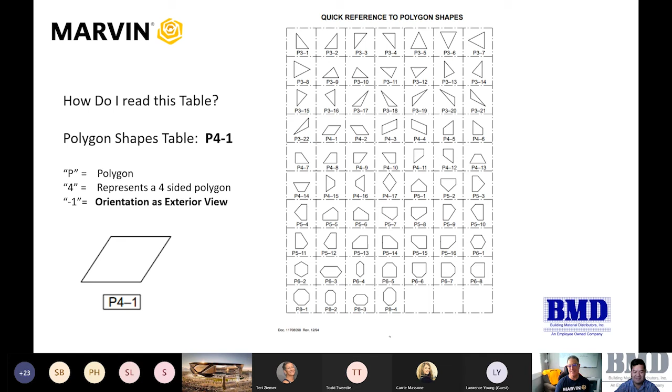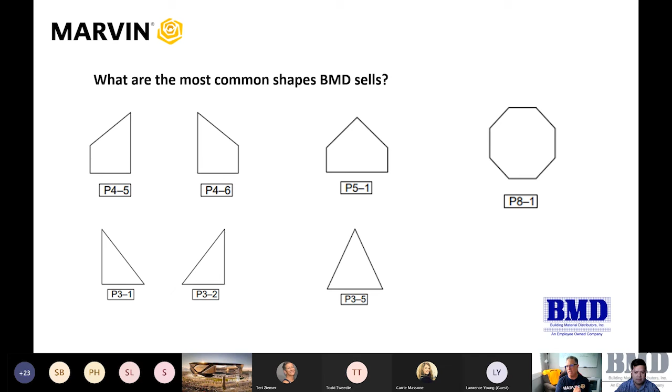Go ahead, next. By far and away, P4-5 and P4-6 are the most specified and sold polygons, but these five other shapes also come into play pretty often as well. So kind of commit these to memory if you like.

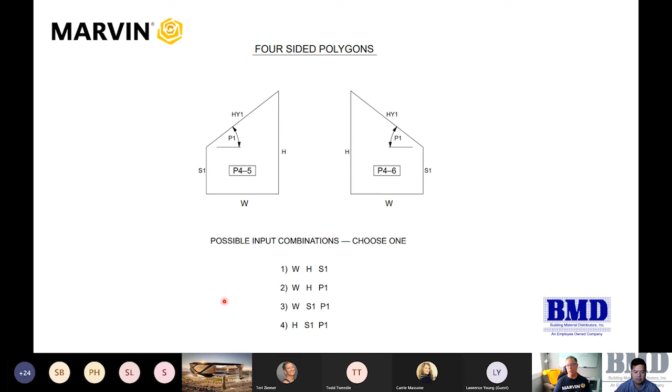There are several entry combinations depending on the information provided. So let's define: you have your width, your height (H), your short leg is S1, and your pitch is P1. You will need to receive at least 3 out of 4 dimensions here in order to correctly build the polygon you're wanting. There's several inputs in determining sizing for polygons. Width, height, and short leg is most common, but if an architect or builder gives us a pitch, we can use that in lieu of the short leg dimension.

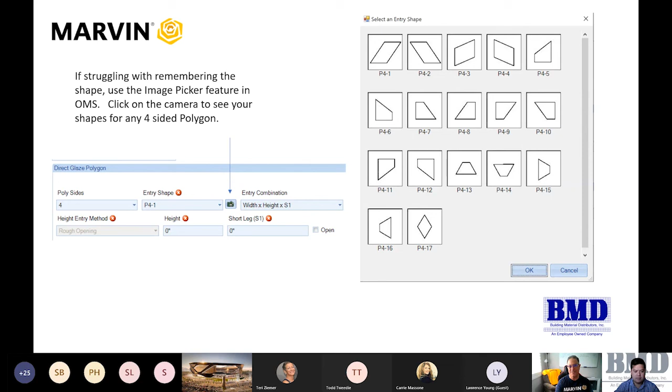Let me diverge here quickly. The image picker in OMS is your friend. This little camera icon has helped me countless times and saved me countless times. Whenever you see that camera in OMS, get into the habit of clicking on it. Marvin sometimes calls things something you may know as something else, so every time you see that image picker, please click on it. It will save you headaches down the road for sure.

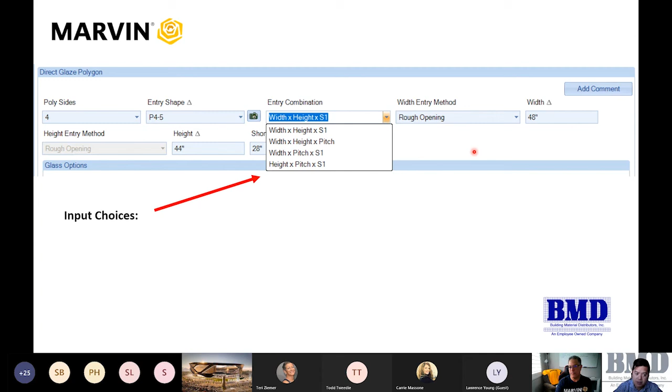Input choices: in OMS, when building the polygon, use one of 4 combinations for sizing. These combinations are utilized when building ultimate, elevate, or essential polygons. I've noticed on a lot of the plans in the design phase, sometimes they only have 2 pieces of information, so I have to reach out and ask, do you have the pitch of the roof, or the measurement of the short leg? A lot of times in the design phase they don't have the short leg, but they will have the pitch of the roof. So if we select this, the option for pitch will show up, and then you can enter your pitch, which Randy will talk about here.

If you receive pitch as one of your dimensions, please don't get nervous, it's still fairly simple to enter. It's typically written as 5/12 or 4/12, meaning 5 inches of rise for every 12 inches of run, or 4 inches of rise for every 12 inches of run. That's what they mean, and that gives you your angle. They read it as 5 and 12, 4 and 12. You can even do a custom pitch - if you scroll down, it'll allow you to put a custom pitch that's not supplied there.

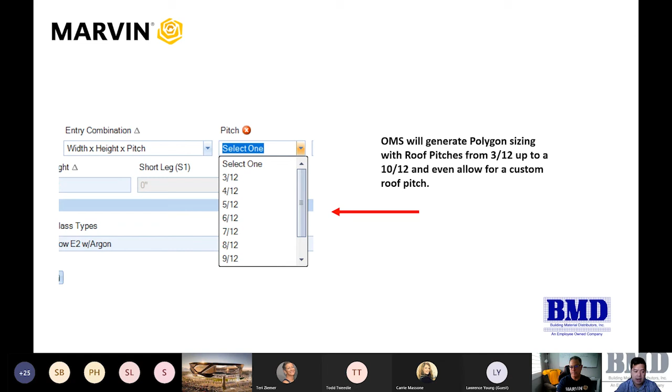I can't see the chat box, Randy, so you'll have to monitor that. If you see something missing, feel free to type it in.

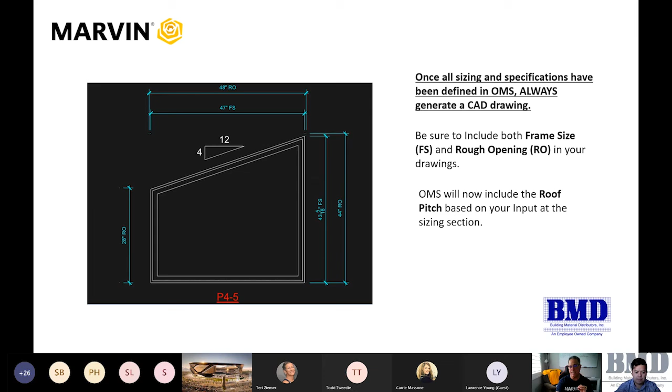Once you hit done creating it, go over to more actions, scroll down to view CAD drawing, click that, and these images will pop up for you. Very simple. To get the mirror image, copy that line and go from P4-5 to P4-6, then hit done. Same process again: go to more actions, view CAD drawing.

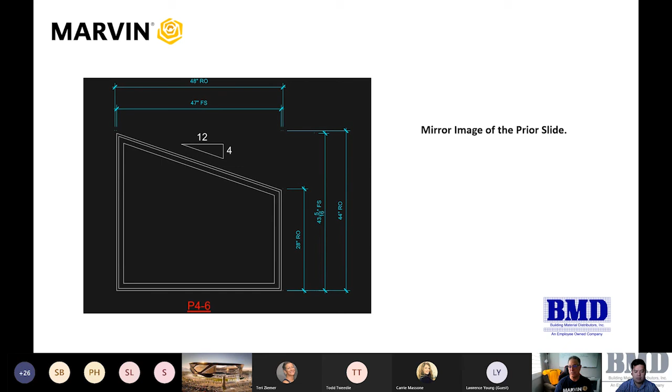Okay, very important to do — and save. Yes, and save. Please save, hit save.

This slide right here is something Alex threw together in a matter of minutes, and it's a great way for you, the dealer salesperson, to save your backside down the road. Any kind of sizing issues, you're going to want this sign-off sheet. It's literally utilizing a blank Word doc and the snipping tool. Put this together, send it out, make sure you're getting these signed, having a paper trail like this attached to any quote or purchase order — it can exonerate you from any potential liability of sizing or shape errors on the Marvin Polygon.

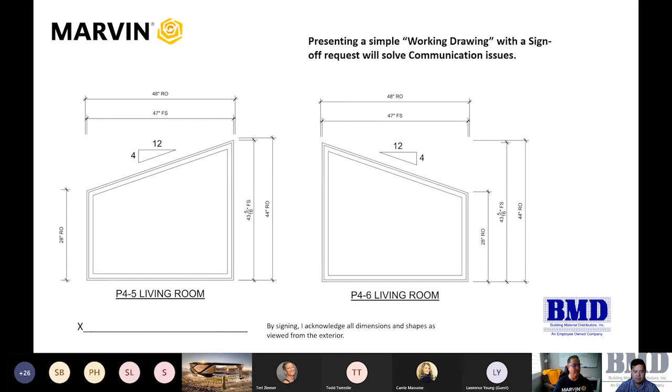All right, let's take a moment — I'm going to steal this picture from one of Randy's slides before, and we'll play a hypothetical situation. Let's imagine architect Randy has reached out to us, and he's defined a group of polygons for us. We see here A1, A2, and A3.

Randy gives us additional information — he's telling me that in between A1 and A2 there's 18 inches, and then there's 8 inches between A2 and A3, all while having a 4 and 12 roof pitch. What can we do? We can use our trusty OMS. We can build these three units, right?

We also labeled it to help identify where in the house it is. But what you're looking at here is essentially a textbook working drawing that's going to define exactly what the architect has requested and is ready to be ordered. Note that this assembly matrix is A1, A2, A3.

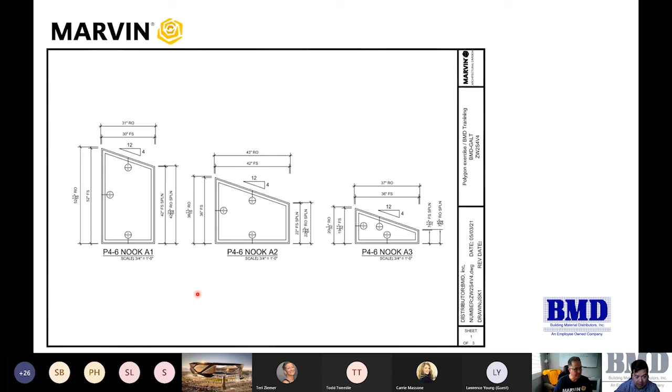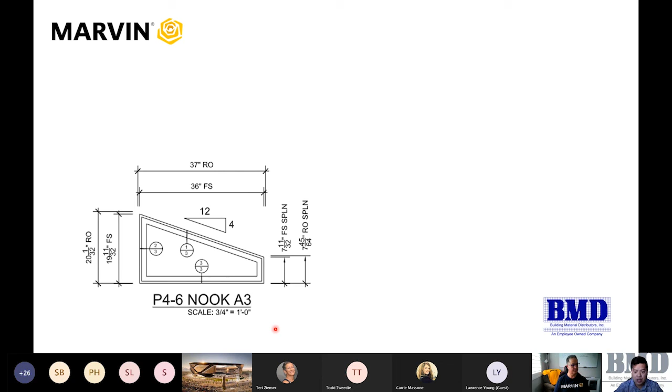We're going to take a deeper dive here just so we can see a closer look — again, frame size, rough opening, and roof pitch. We're always going to show that very vital information. Again, here's A3, just so everyone can see it. Remember, architect Randy said he has 3 windows with distance in between. So what can we do to bring more value and help the architect?

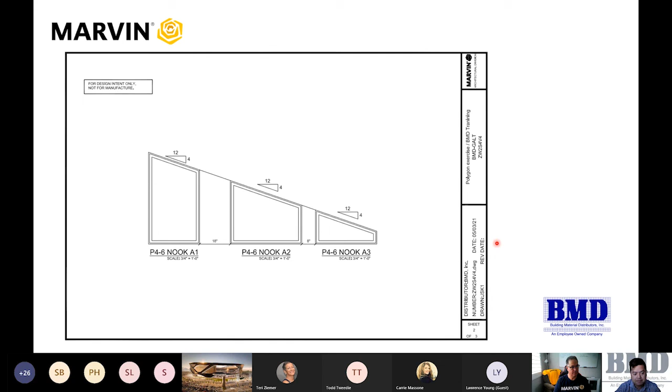Well, using OMS, you can create assistance requests. You explain all the information that architect Randy has given us, and our inside sales team can create this drawing and get it back to us. So we're going to take a deeper dive into it, and as you can see, the detail now supplies all the necessary information, as well as that 18 inches in between A1 and A2, and the 8 inches in between A2 and A3.

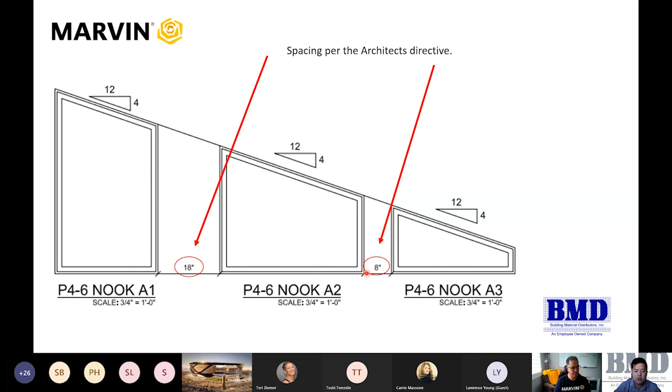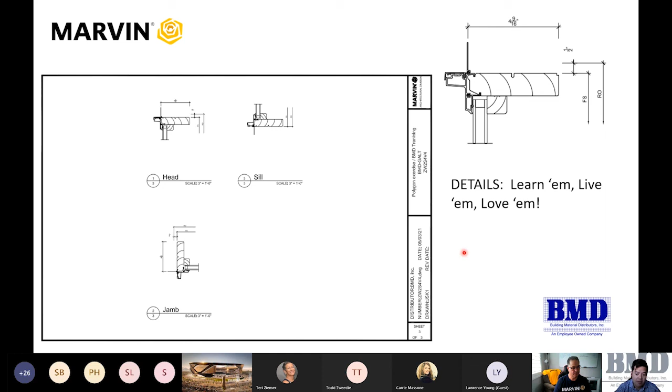Details, details, details. If you've worked with me in the past, or with BMD or any of our territory managers, you'll know we love these details. So on the last page of the BMD drawing, we're going to show you the details of the rough opening and the frame size for full clarification on where the dimensions can be pulled from. This will show you the shim space between the rough opening and the frame size. So again, use these details.

Now, this is where I myself need to slow down, because this is where I messed up, and I spent a lot of time rewording how I'm going to say this. Essentially, if you've worked with polygons in the past, most likely it's been squares or rectangles. When working with rectangles and squares, the conversion is more simple, right? The rough opening and frame size differ by 1 inch in width, so 1/2 inch each side, and then 1/2 inch in height — that's pretty simple.

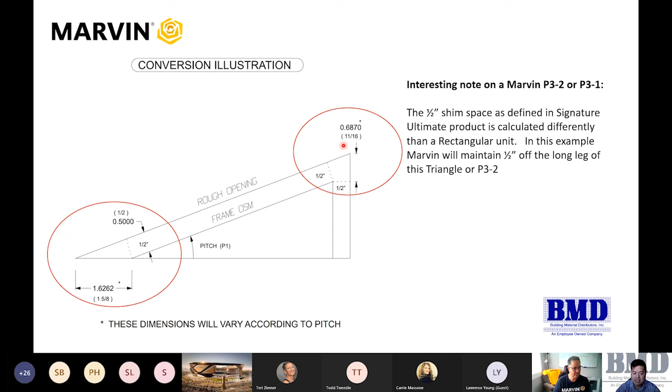But again, we have to run the hypotenuse from the adjacent line all the way to the opposite line. This is a great opportunity to use your drawings. Print them out so they'll look like this. Share them with your architect, share them with your builder, make sure everyone signs it and everyone has a copy.

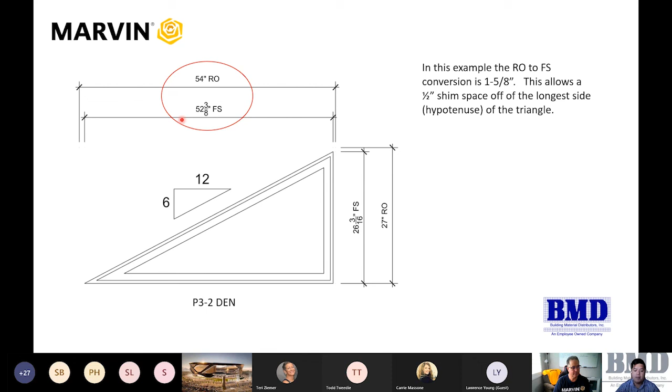Again, we're showing frame size, rough opening, pitch. And here, that's not a 1/2 inch, that's 1 5/8. So I just wanted to slow down and explain the triangles. When working with P3, and we're looking at a P3-2 here, it's not just the 1/2 inch that's part of the equation. You must dive deeper.

If you know me, I'm a stickler for organization. I am an avid note taker, and something that's been really important to me was good file management. We work on so many projects a year. I can be working on a project in San Anselmo last week, and this week I'll have 3 different projects in Santa Cruz. If I don't have good file management, it's very easy to get confused and mixed up. So how we can help with that is we actually have a notes and attachment section in OMS.

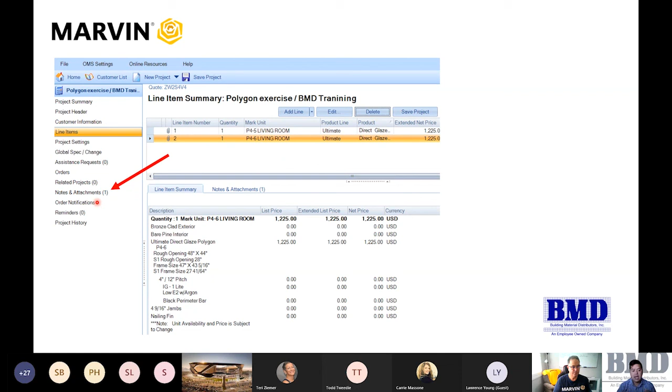I'm sure everyone here has used it, but I just wanted to touch on it. Just like the image picker, our camera friend, I try to make this muscle memory, a habit that if I have details or drawings, I'm loading them into the notes and attachments. You click here, and then it'll allow you to add the note and attachment. After you name it, you choose the type of file. I always add a little description of what I'm loading, like a window schedule, and when I got it.

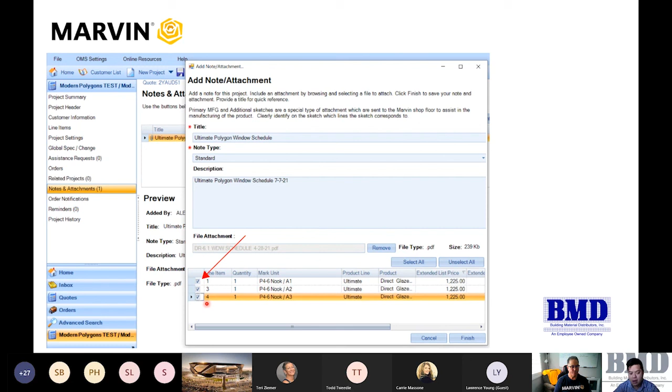More importantly, let's say you have 30 lines, but you only wanted the details I created for the Nook for A1, A2, A3 — we can hand select the line items that you want this actual detail to be connected with. That will help any information for our inside sales review for Marvin Factory. We're just trying to streamline the information.

Especially for myself, I work in the design phase with architects, and there are a lot of changes. So what I like to do, even though I like to load all the information, is let inside sales and everyone on the team know what is an old detail or an old set of plans that is technically obsolete.

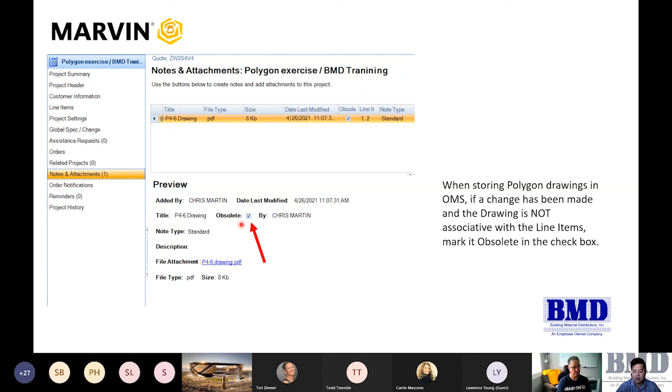That's exactly what this button is here. So this drawing is no longer valid — we've changed the pitch, we've changed the height. By clicking obsolete, it's going to remember that this is no longer an updated version of that drawing. Now, the trick here is when you go to submit your order, that obsolete file automatically gets selected. I don't know why, but I do know we have to manually unselect any obsolete files. This essentially gets rid of any confusion that can happen when we're ordering the product.

In review: know your shapes, do your best to commit them to memory. Your P4-5, your P4-6 is primarily where you're going to be spending most of your time, but it's good to know the other options. Again, use that image picker, and be sure to use the correct input or entry combinations depending on what information you were supplied. So if you have the pitch, ensure you're choosing the entry combination with the pitch.

Always present your CAD drawings to your general contractor, installer, approving authority, architect. Use our drawings, it's a free service — please utilize it. All of our drawings will supply the rough opening, the frame size, and the roof pitch. Store these drawings, or for example that sign-off sheet that Randy was talking about — once you get that signed off, store it in OMS to the exact line item you created it for.

Label your drawings, that will always help — living room, nook, garage, whatever it is. And finally, get sign-offs from the approving authority on your drawings, and again load them into notes and attachments so that inside sales and everyone on the team has them.